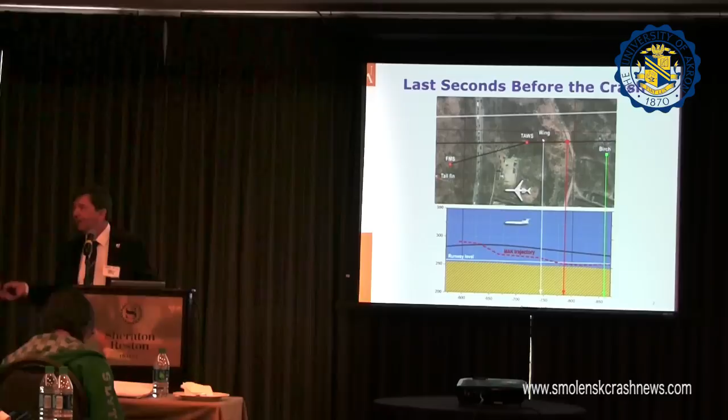Now this wing is found here, about 110 meters from the location of the birch tree. So somehow, according to the report, the tree cut off a 6-meter wing from the airplane that was flying 80 meters per second, and that wing was able to maneuver through trees and bushes and everything else and landed 110 meters away without touching anything, not making a scratch on any tree. And in fact, the airplane also, as you can see, this is a whole forest here, and somehow it was able to hit a tree inside the forest without touching any other tree. So that is also questionable — how is that physically possible?

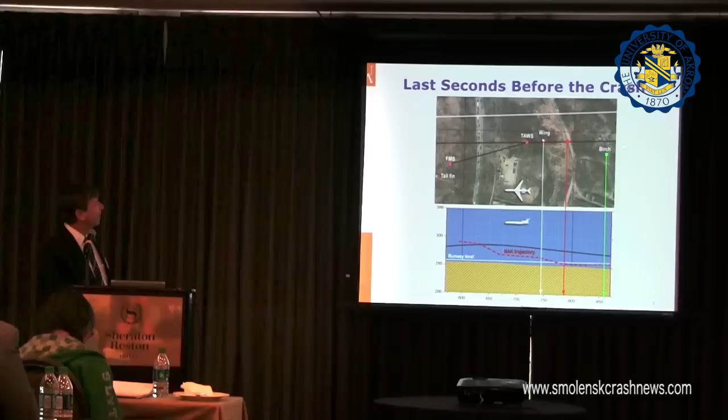But anyway, the airplane was flying straight, as you can see according to the Russian report, and somewhere here it turned suddenly about 20 degrees left and hit the ground somewhere in this area. This is the location, about 30 meters above the ground, where all the electricity, the FMS, everything was shut down. So this is the last moment of recording information from the black boxes. According to the Russian report, at this moment the airplane was 30 meters above the ground. So what happened? That was never explained.

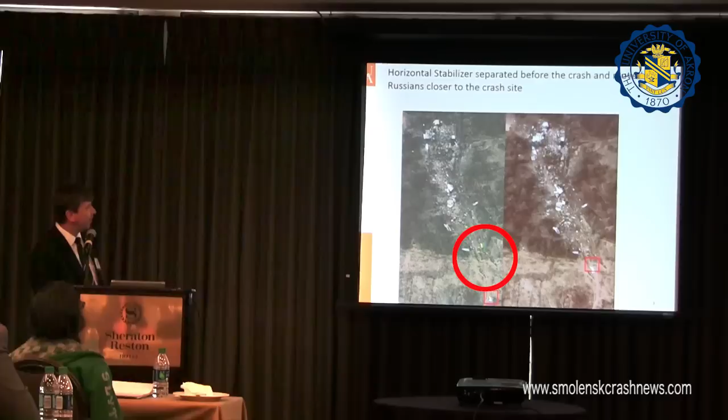Now, if we look at the area of disintegration of the airplane, this is the location of the first marks of the airplane on the ground. There are only a few scratches, about 40 centimeters wide, 40 centimeters deep, and several meters long, as you can see here. The whole airplane disintegrated into 60,000 pieces. To give you an example, in Lockerbie, the Pan Am plane was destroyed by a bomb into 10,000 pieces, and they found 98% of that. We visited TWA yesterday, and to my knowledge that airplane disintegrated into about 6,000 pieces, and I heard yesterday that they found 95 or 98% of the pieces and reconstructed it, as we could see yesterday.

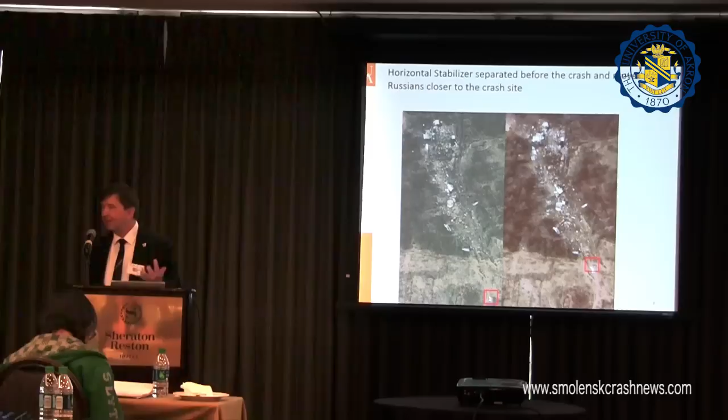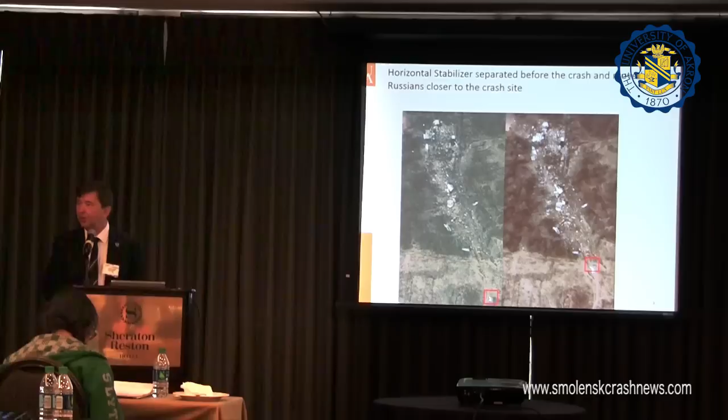Here in Russia, you saw the video of destruction of the evidence, and this is the 11th of April, the day after — two days after, two satellite pictures. You can see the same part traveled overnight from one spot to another. We asked Russia why they moved those parts. Moreover, in the report, you find that before they could move it, they could record their position, take pictures, and move it wherever they like — this is according to standards.

But we found in the report that the position shown is much closer to the point where the airplane touched the ground than it actually was. They said, well, it was basically some bystanders trying to steal aluminum, and militia was running after them, and they dropped it.

Okay, so that was the explanation. Trouble is that this piece weighs about 400 pounds. I cannot imagine that somebody just pulling a 400 pound piece of aluminum and running away, with militia running after them. So there's a lot of questions, a lot of problems of violation of standards that we know.

These photos are from satellite pictures that you can buy, commercial satellite pictures. They are available—we paid $100 for a picture when we have it. A lot of people suspected that something is not correct. You can buy those satellite pictures from Google or equivalent Google Earth places anytime. So it's commercial, they are commercial.

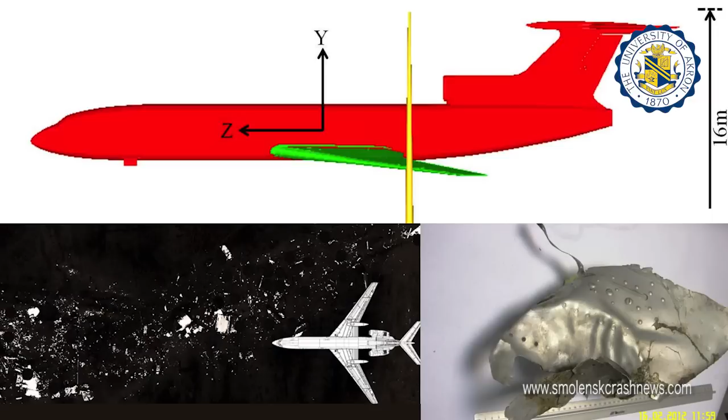This piece was lost way before this airplane hit the ground. Of course, it was explained by Russia that the plane disintegrated in the air because of this birch tree—not only did the tree hit the wing and shear a third of it, but basically the whole airplane disintegrated because it became like brittle material. They say, well, obviously at this speed, 80 meters per second, the airplane is very brittle and breaks on contact with any branches of trees or anything else. So even though the plane was flying another 300, 400 meters, it left a lot of pieces along the way before even hitting the ground.

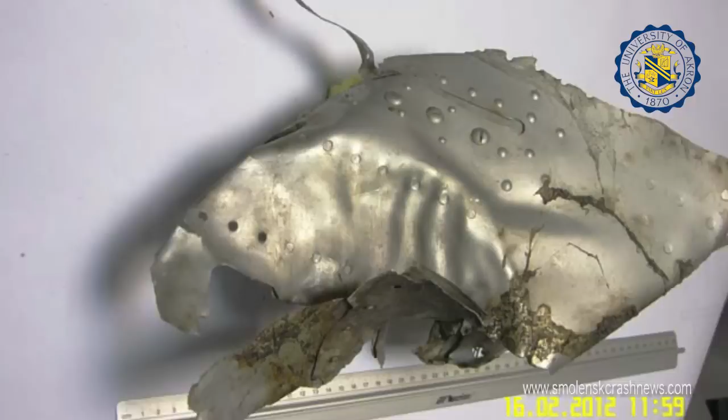One of the experts from Poland, looking at this particular piece, found that this is a typical example of explosion. The size is small, and the higher the energy in an explosion, the smaller the pieces you have from the airplane or frame. These are called shrapnel, basically—like a grenade. And you have the typical shape of internal pressure.

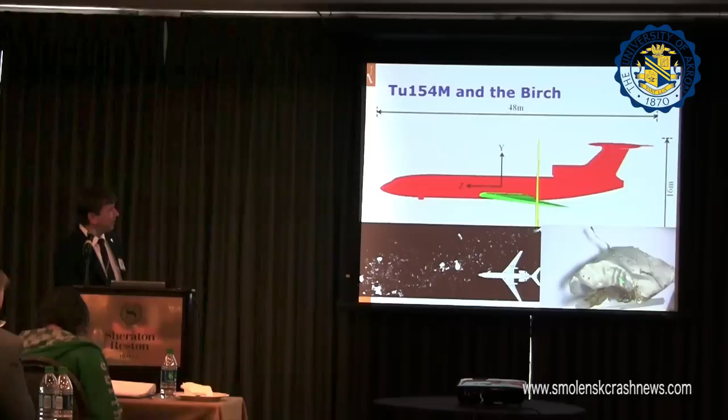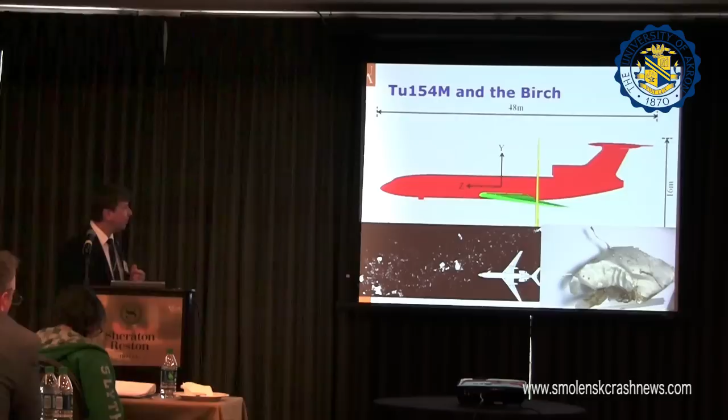What is nice about aluminum is that a snapshot preserves the state at the maximum deformation. So you can see the pressure that pushed this piece—this is a piece of the wing, outside. You have dark parts inside and shiny outside. The dark is because of high temperature inside. And you have rivets that are pulled out. Rivets work in shear, they are not working in tension. So if something is pulled out, it means you have to have normal pressure, not shear pressure, as one would expect in a crash into valleys or other obstacles.

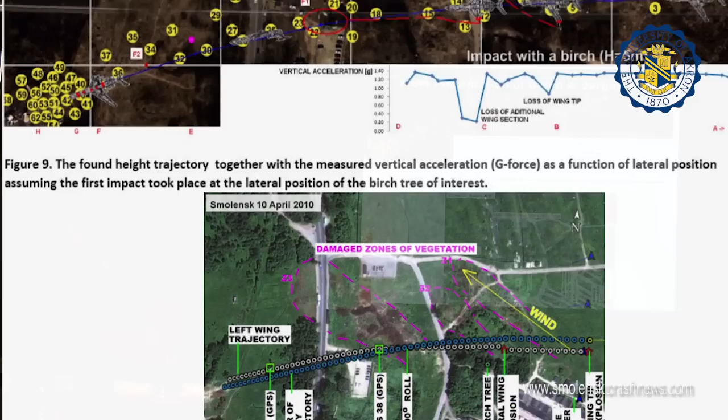Another researcher from Denmark, looking at the situation, found all this—this is the location of the crash into the ground. But you can see all these parts of this airplane all over. Even this is the location of the so-called birch tree, but the first parts are way 70 meters before the tree. So they were never explained.

And we know about them because we have that good help, which I cannot talk about. But anyway, these pieces are basically evidence that the tree has nothing to do with this. A lot of parts are around the tree, so you can imagine that if they fell to the ground and hung on the tops of other trees, that means they were flying with that velocity and eventually slowed down to hang on the other trees, so you have all this weight.

He was also focusing on the change of vegetation color, discoloration of the vegetation in the satellite picture. One picture is from April 10, and the other is from summer, a month later. April in Russia is springtime, when the vegetation wakes up. He found three discolorations in the typical shape that one would produce by spraying fuel.

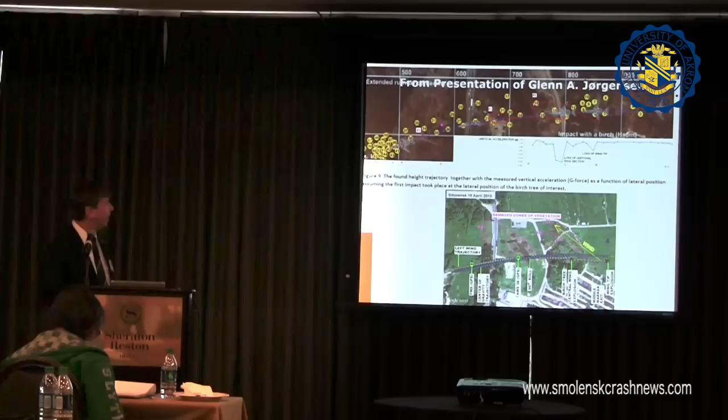So we collected several million pictures from every angle of every spot, which is accidental, well-documented material not produced by Russia, but produced by journalists who just took pictures for their own sake.

It may be broken due to the air of the low-flying airplane, just like turbulence that can produce that. But I'm not speculating anything, I'm an open-minded person.

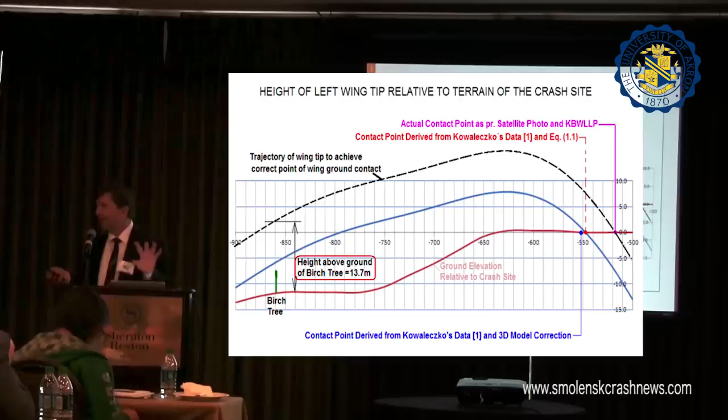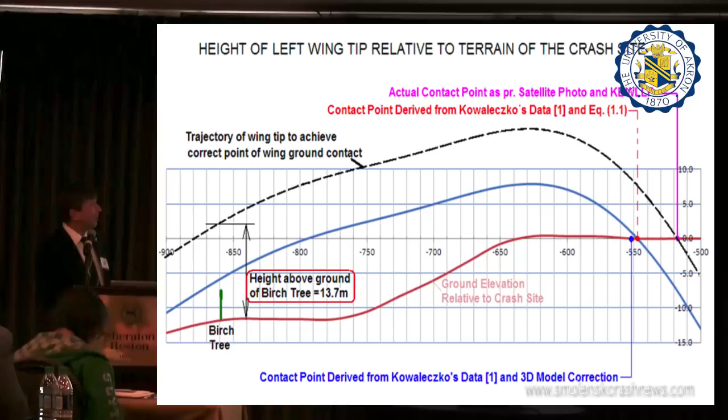Another professor, Jorgensen, and Kowaleczko from Poland and Denmark, did calculations of aerodynamics using information from the black boxes that were copied and given to Poland. He calculated what the loss of the wing should be in order to produce the upside-down rotation recorded by the black boxes. Based on aerodynamics, if you shear off 6 meters of the wing, and since the wing is trapezoid, not as wide at the tip as at the root, you're not losing 30% of the lift force, only about 10 to 12%.

Especially since the pressure is not uniform across the whole wing, it's kind of sinusoidal, for simplicity. So when you shear off a third of the wing, pilots can basically continue adjusting their ailerons and keep flying straight, or at least mitigate the loss of lift force. In fact, Boeing engineers told me that airplanes are designed for a 20% difference in lift force due to a burst of the wing, meaning the pilot should be able to control the airplane with up to 20% difference in lift force. Of course this was not a Boeing, it was a Tupolev, a copy of the Boeing 727, so maybe it wasn't as good, but in general we suspect that losing a third of the wing would not be enough.

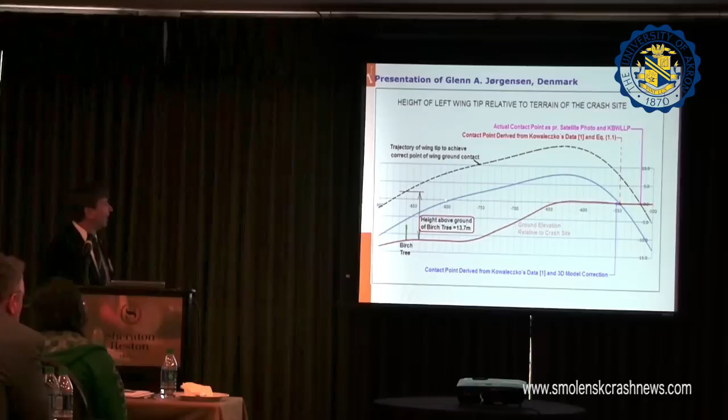But if you lose two-thirds of the wing, in order to fall at this location, the first touch to the ground, the airplane must be much higher than it could be to hit the tree. So basically, no matter what calculations you do, it won't be exactly at the location of the breaking of the tree, but some meters away, because unfortunately this is like a valley, and the location of the fall of the airplane is at a higher elevation. So there's some difference between the tree and that position.

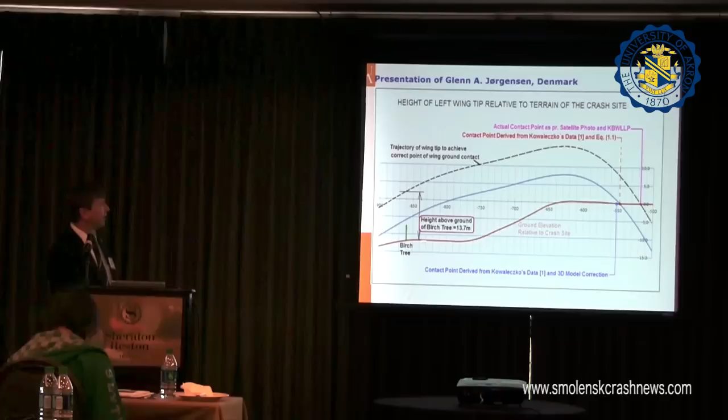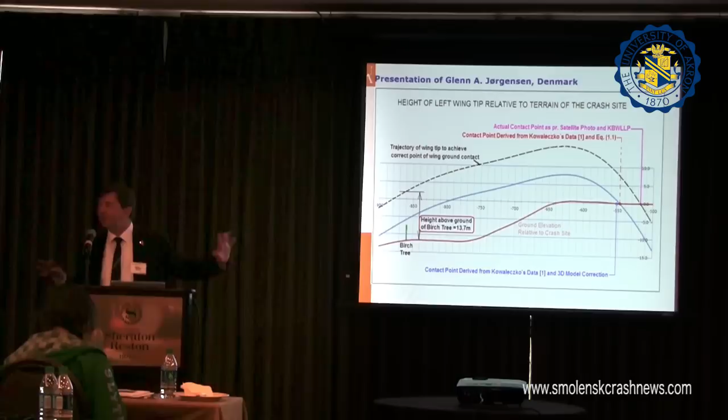So anyway, for those debris to fall in this location where they should, the airplane is about 30 to 50 meters off, which confirms, by the way, this TAWS measurement. This is completely independent, done using aerodynamics calculations, and this is what happened.

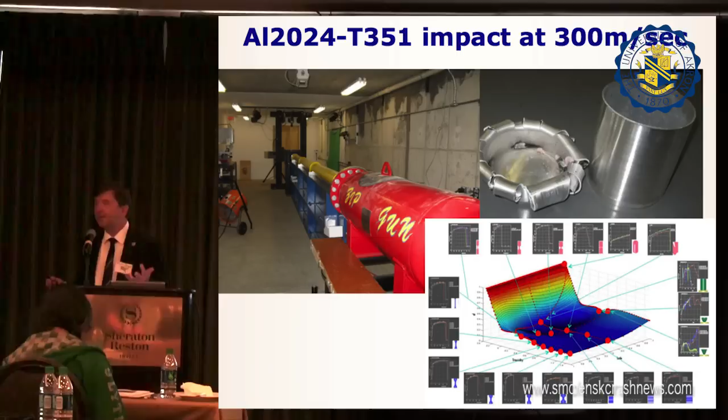The airplane is made of aluminum, as we know. And we remember the World Trade Center, when the aluminum airplane hit it and cut the shape of the plane, and those vertical lines you can remember on the outside of the World Trade Center were made of steel, not birch, but steel. Steel is much tougher, much stronger than aluminum. So it happens that experiments show that with the speed of the airplane, it is possible to have a situation where the aluminum wings can cut through the steel columns, as was shown in the World Trade Center.

So we, together with other professors and researchers from NASA and FAA, focused for the last 10 years to characterize aluminum 2024 T351, which is used for the wing of the airplane. If you went to school some time ago, you know that aluminum is an elastic-plastic material, and they give you a curve from maximum strength to maximum strain.

But aluminum is a very interesting material. It behaves differently if it is under a unidirectional state of stress or a multi-directional state of stress. Although this is a thin-walled tube type of material, meaning the skin of the wing or the fuselage, during the crash it is under combined load. It is under tension in both directions and compression in a third. So the strength, this is the so-called surface of the strength of aluminum.

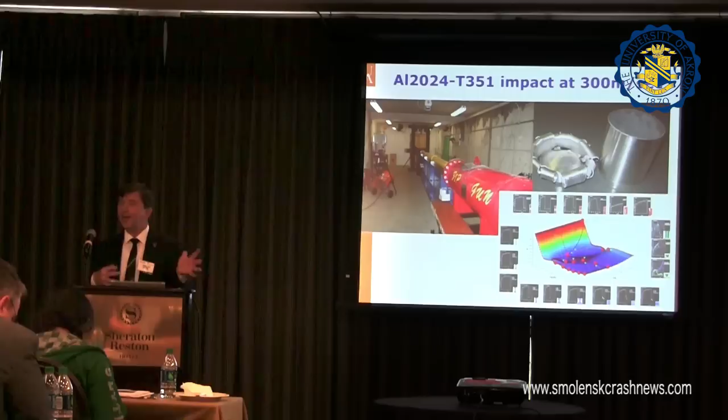We put a lot of tests together, as you can see here. A lot of universities contributed to that and characterized this material very closely. Now we are able to use this characterized material, as is done by state-of-the-art LS-DYNA, and simulate the events as we wish.

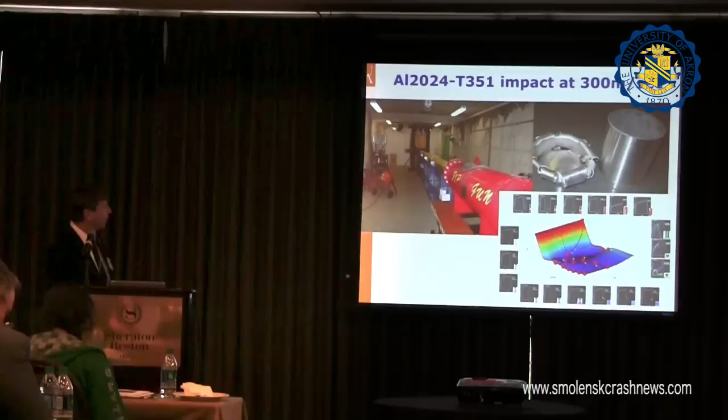I want to come back. One thing I did was a test using a gas gun. This is the gas gun in my laboratory, which can accelerate objects to velocities up to the speed of sound. I used this same material, which is used for airplanes, in the structure of that shape, and even at 300 meters per second, which is more than 4 times the velocity of the airplane in Smolensk, the material does not disintegrate into any pieces.

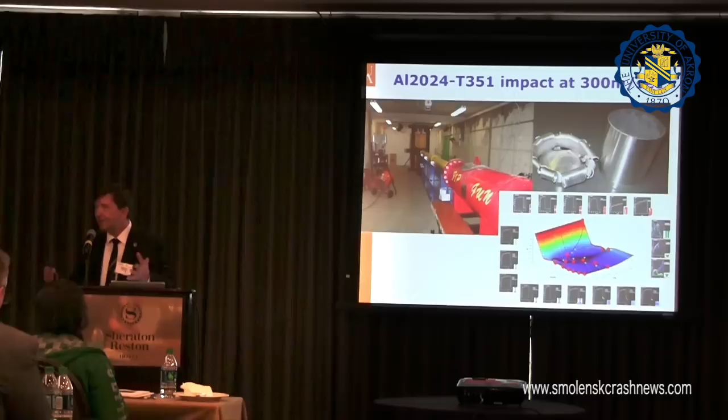As you can see, this is before the crash into the steel wall, and this is after the crash into the steel wall. It is very plastic, it fractures, it curls, as you can see here, but it does not produce any shrapnel. It's not flying apart into components.

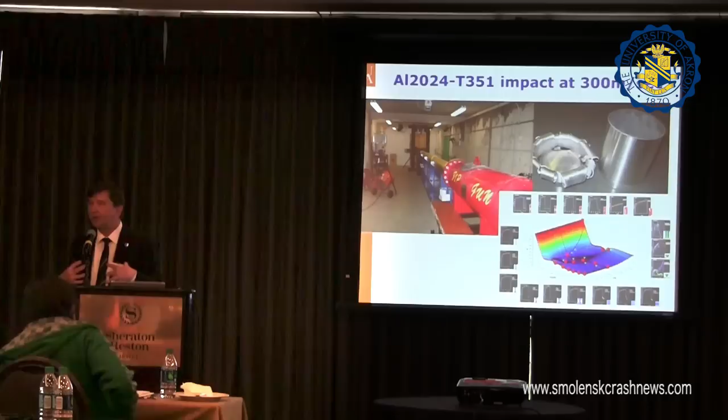So the material is not brittle, and it shouldn't be, because if we have a bird strike, and the material is brittle, then the whole airplane would break into pieces like glass. That would be bad. We want the material to absorb the fracture and not break into many shrapnels and pieces.

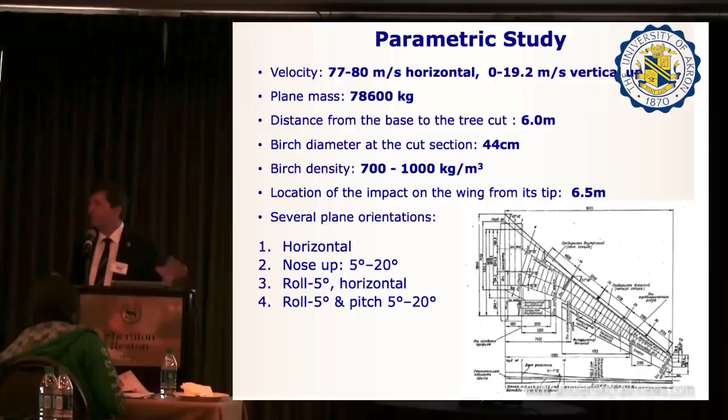Not knowing a lot of things at first, we did parametric studies with my graduate students, who got PhDs and master's degrees. We changed velocities, we changed the orientation of the airplane, but we used this material model, which in comparison is the stress-strain curve of aluminum 2024 T351 compared with birch. The steel would be much higher over there.

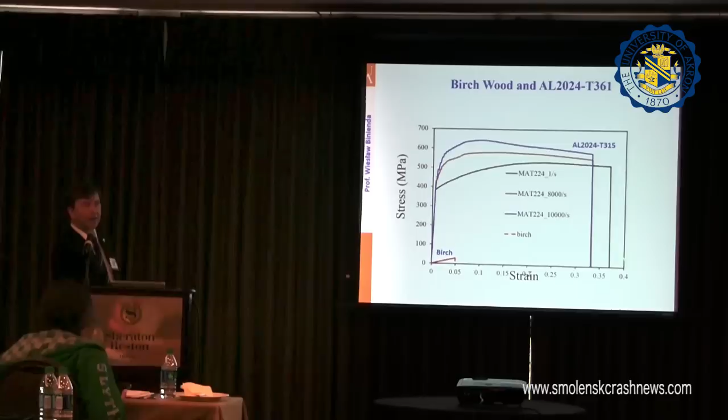So in the World Trade Center, this material, characterized by those two curves which are strain rate dependent, was able to cut through steel, which is 3 times stronger than aluminum. And this is the birch. The toughness of the material, the energy needed to fracture it into pieces, is the area under the curve. So the area of this triangle compared to the area under this black line — I don't need to prove that this one is much smaller than that one, right? So you can say that yes, the material is much weaker.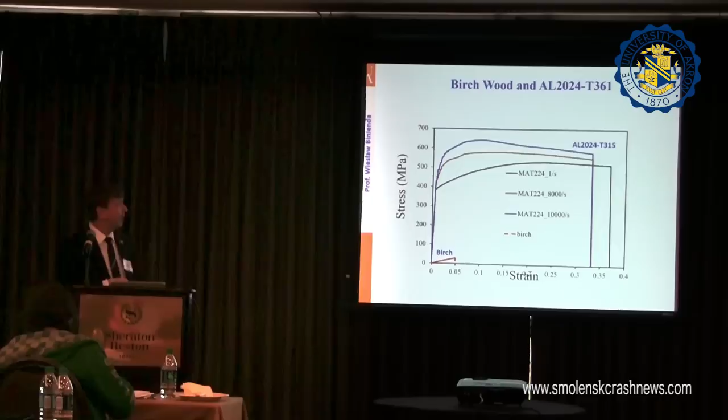So I will show you the simulation. This is the simulation of this airplane that we built basically in finite elements with state-of-the-art methods for the materials characterization. And what happened?

We can see that the airplane cuts through the birch tree and still has the wings, as you can see, in good shape. Let's look closer. Of course, there's damage to the leading edge. This is where the material is very thin.

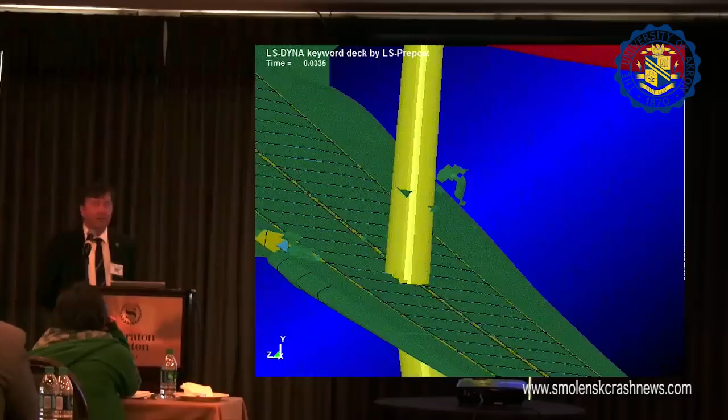But the first spar is solid enough, and we saw those spars yesterday in the Boeing 747. They are pretty strong, and they are able to cut through this wing. Imagine that the whole event of cutting through this is 0.099 seconds.

So this is very fast. The airplane is flying at 40 meters per second, so this is like an explosive. Basically the tree is feeling the explosive pressure.

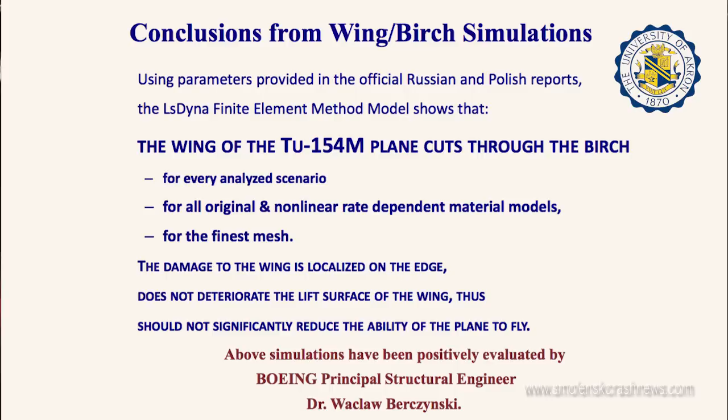So conclusions are obvious that the tree has nothing to do with the wing damage.

I wanted to mention that there was an FAA test using the airplane Constellation, and yesterday in the museum there was that airplane, I saw it. The Constellation is an old airplane with 4 propeller engines. It is about half the weight, half the speed. So you can imagine that wings are much weaker, because the wings are what holds the mass and speed of the airplane.

Professor Bocchieri from California did similar work as I did for this, using an FAA experiment where an airplane cut through an electric pole. As you can see, the electric pole is in pieces flying after this airplane. This is experimental, and it confirms the result even 100%. So it's not just my work, but other people's work that confirms those same results.

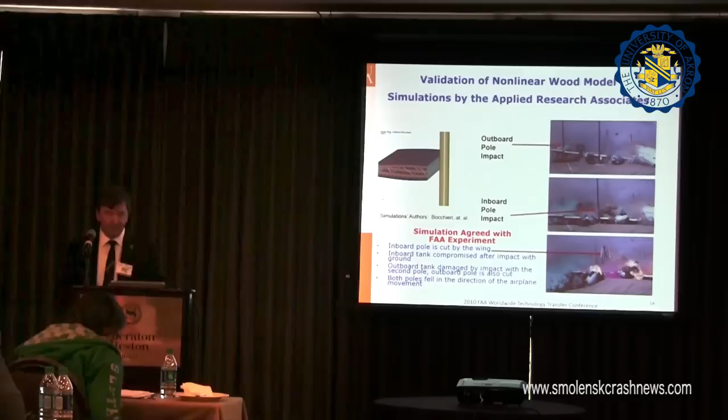Now, yesterday we saw a reconstruction of the important part of the airplane in the hangar. Well, the Russians never did it, okay? So what we did, we reconstructed it on paper.

We found all pieces from those millions of pictures and tried to find what we could identify and what we couldn't. We were able to identify all pieces, and the critical one is the leading edge. I don't know if you remember, in my simulation the leading edge showed disintegration from contact with the tree - about 60 to 80 centimeters, basically a removal of this front leading edge.

Now we found undamaged or slightly damaged slats of the leading edge, so there is no contact with anything. If they are sitting like that, they are not damaged, not bent, not broken, not crushed.

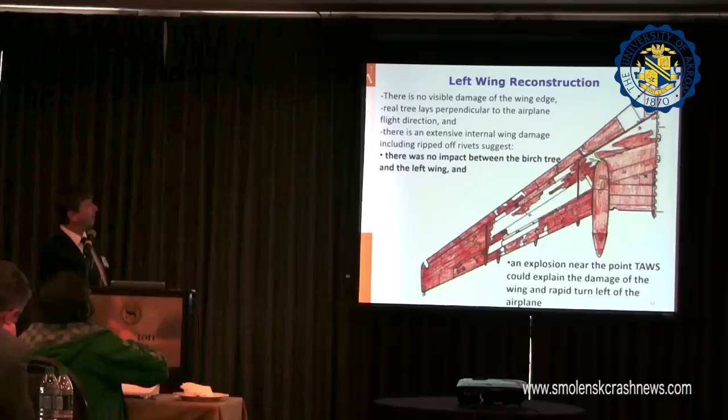However, there is a big hole in the center part of the wing. That correlates, in fact, with calculations from the guy from Denmark about a bigger loss of the wing. And obviously, if you remove this material from that part of the wing, this will fly away, because there's nothing to hold it. So that has nothing to do with it.

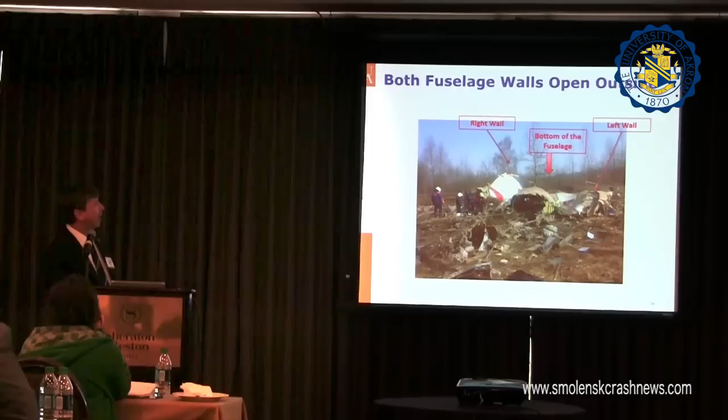What else can we see? This is one part of the fuselage that is indeed upside down. This is the bottom of the airplane. There is a floor where the seat is supposed to be connected. One side of the airplane and ceiling is on that side, and the other is on the other side.

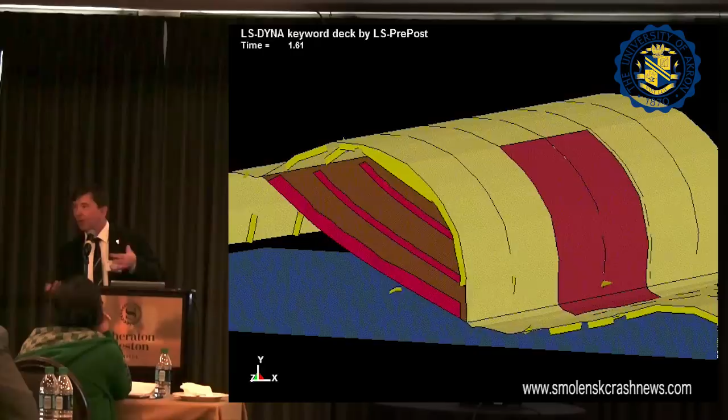To me, this means that the airplane had to open before it hit the ground, because only then can you have both sides outside of the floor. If it happened by crashing, one wall or the other wall or the ceiling would be under the floor, not outside the floor.

How about a rebound - after the fuselage strikes the ground, it rebounds up, and you have this... and you have this expansion on both sides? Could that not happen?

No, because the area was very soft soil. It was wet - people, if you look at the videos, people walking on it sank in the soft, wet soil. So basically it was just like hitting a mat and staying. It was not bouncing, especially a part like that.

The length of that part that I showed was 20 meters. So it's not something that could bounce easily, like here.

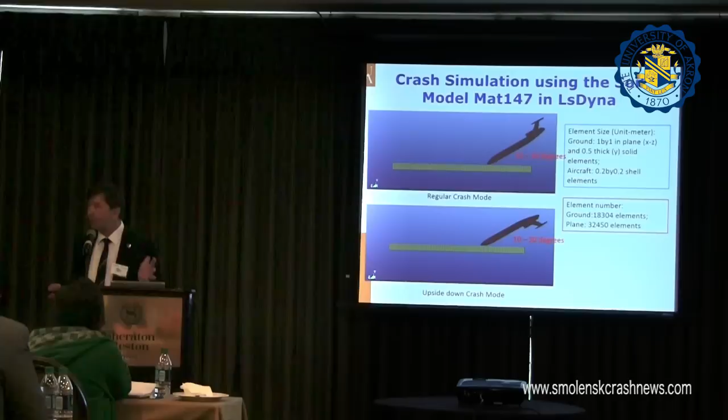But I did also calculations according to the requirements of MAC in Russia, of what will happen if the whole airplane, 80 tons, flies into the ground with a velocity of 80 meters per second, because this is what they say in the report. So not knowing the angle, I used 30 and 10 degrees, again parametrically.

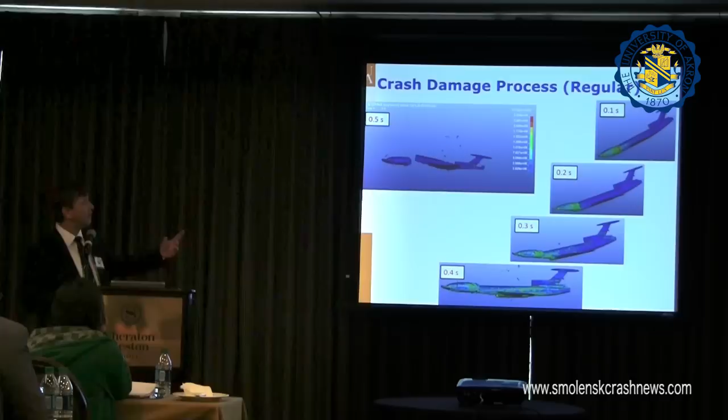This is how the airplane disintegrates at wheels-down position. And it was interesting because this simulation was done way before this experiment was done on a similar airplane, a Boeing 727, in New Mexico, in the United States. And here, of course, there are no passengers inside.

I think you know this experiment, right? So this is just a reminder. The airplane hits the ground with higher velocity, in fact vertical velocity, than according to the MAC report for Boeing 727. And this disintegrates also into 3 pieces, which confirms my simulation perfectly.

So I was very happy because my simulation was done before this experiment was presented at the conference. Moreover, they had dummies inside of this airplane, and they put accelerometers on those dummies, and they found that most of the passengers in the middle section and aft section would survive this crash.

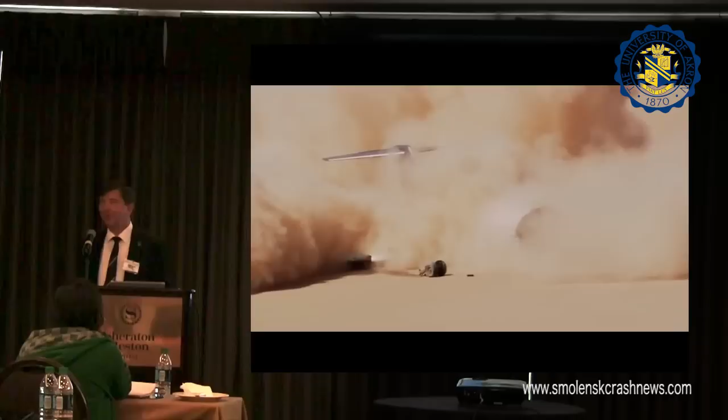Of course, people in first class and business class may not. Okay, so you may want to think about how you're flying.

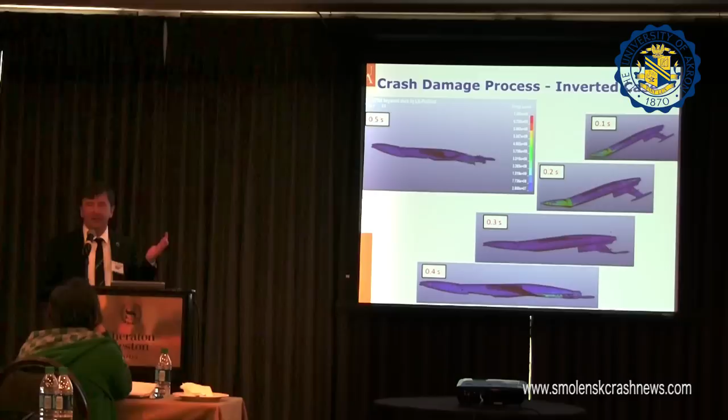Having that model confirmed, I was able to do it upside down, and of course I could see that, and also I could measure the accelerations inside and the fuselage damage. In fact, it is likely that a number of passengers should survive even in that configuration.

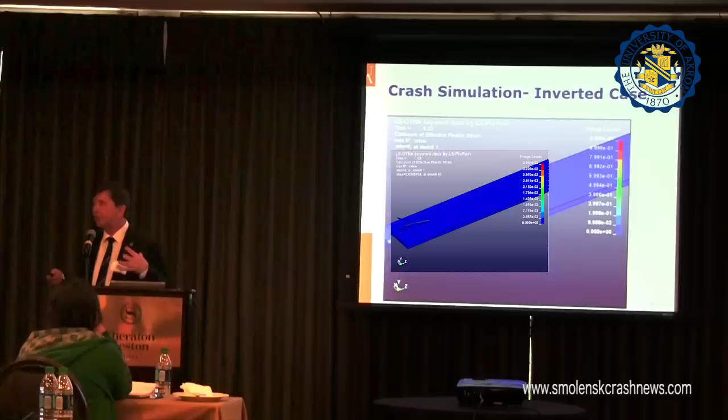And this is the simulation. But more than that, the damage to the airplane is interesting, and the damage to the ground.

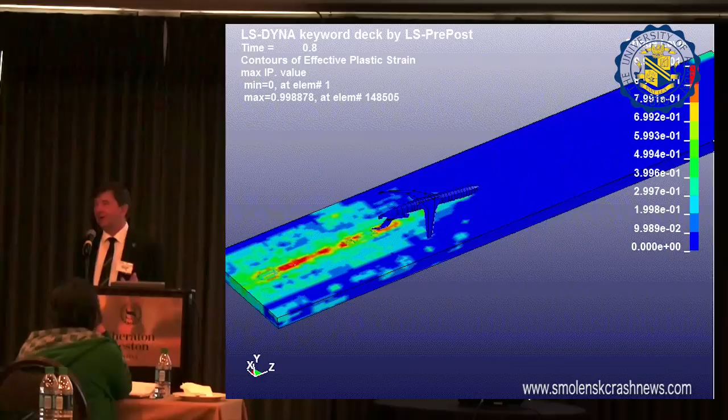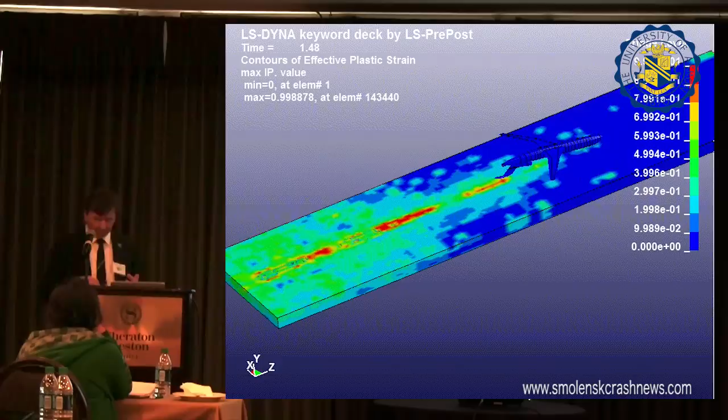I said that this was soft ground. So one would imagine that an airplane flying at 80 meters per second, with Newton's third law - action equals reaction - means there must be significant traces or craters on the soft ground. And I could measure what those would be, how deep and how long they should be.

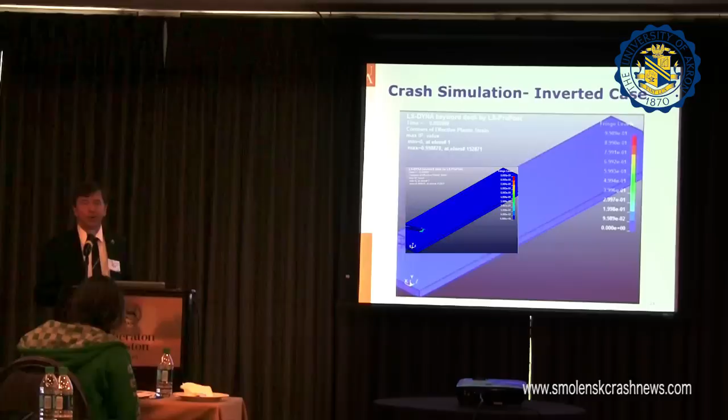Depending, of course, on the angle of the strike of this airplane. So this one was much more significant, more damage to the airplane, deeper craters. So this is all.

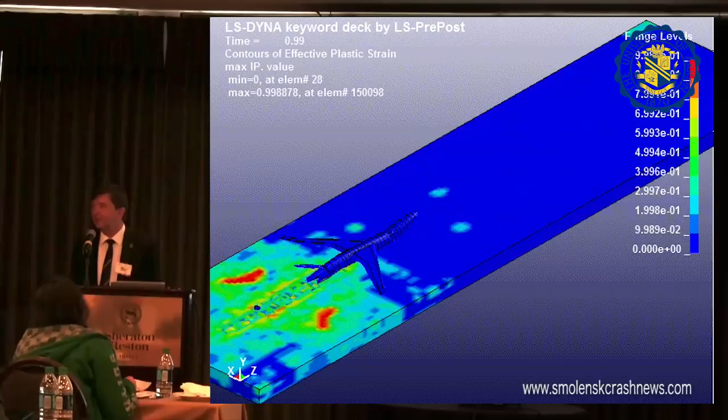This is it, what it is. Okay, this is 40 centimeters deep. This is nothing, okay - there's no crater at all in this ground. So the only way to explain why there's no crater is that instead of one mass of 80 tons hitting the ground at 80 meters per second...

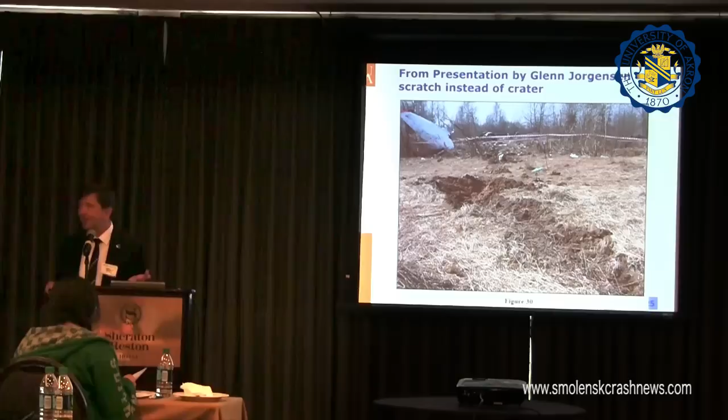...there's a rain of small pieces falling down after the airplane was disintegrated in the air. There's no other physical possibility. Okay, if it had hit as one mass, you should have this type of shapes, traces on the ground.

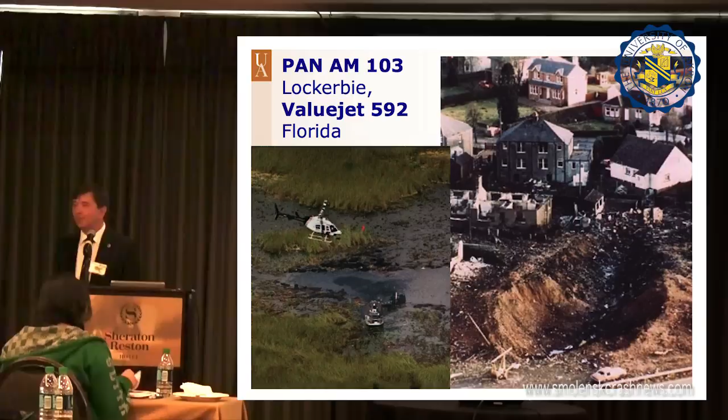Like you can see part of Pan Am in Lockerbie, or the lake produced by ValuJet 592 in Florida. Other examples of airplanes that hit the ground.

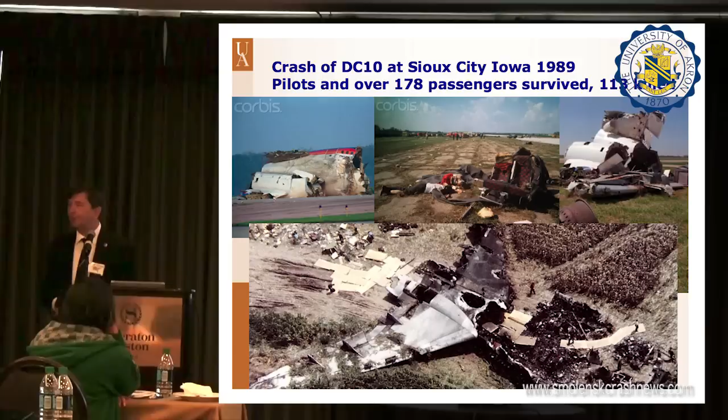This is Sioux City, Iowa. I'm sure you remember that. It was looking very dramatic, but still 178 passengers survived this very dramatic hit to concrete ground, and landed upside down. Also, there was a lot of fire. But what is interesting is that even people who died, you could see them as they look like people.

All victims in Smolensk were naked; somehow the clothes were ripped off from them, and they were covered in a kind of gray substance.

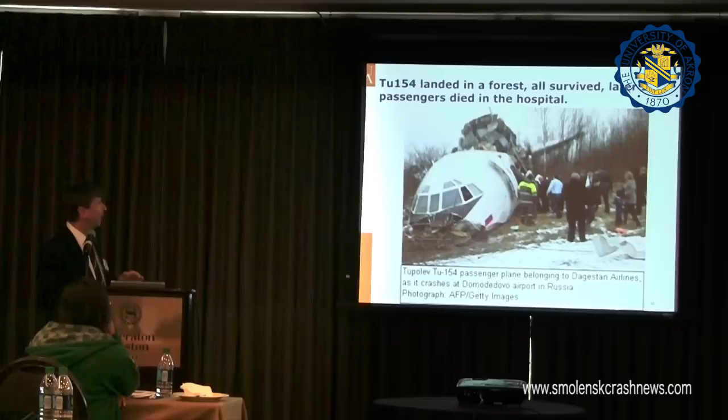Seats - you can see seats in good shape even in that particular crash. All seats were completely disintegrated in Smolensk. So these are important - in other similar crashes without explosion, you can see people survive.

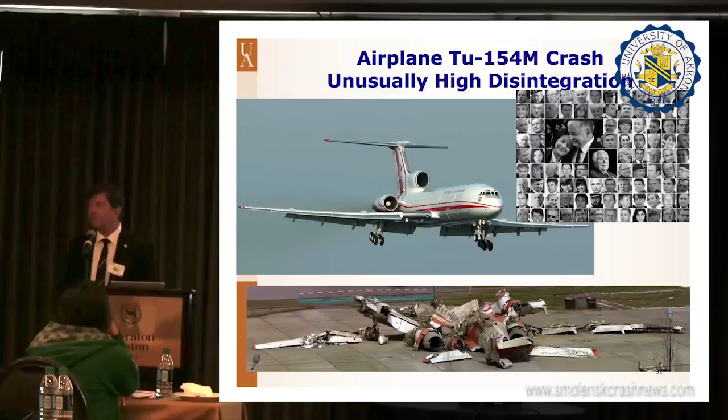And this is a comparison with the Russian reconstruction of the airplane. Okay, this is following the ICAO requirement of the Chicago Convention. This is how they did it - they just dumped everything in one place. In fact, even some of those parts on the left wing are from the right wing.

And what is interesting, however, is that the right wing is also disintegrated into pieces. There's no information about it hitting any trees or anything else, but it has the same type of damage as the left wing. So I will leave it with that. Thank you.

Well, I have to say that it has been very interesting, to say the least, and thank you very much, Doctor.